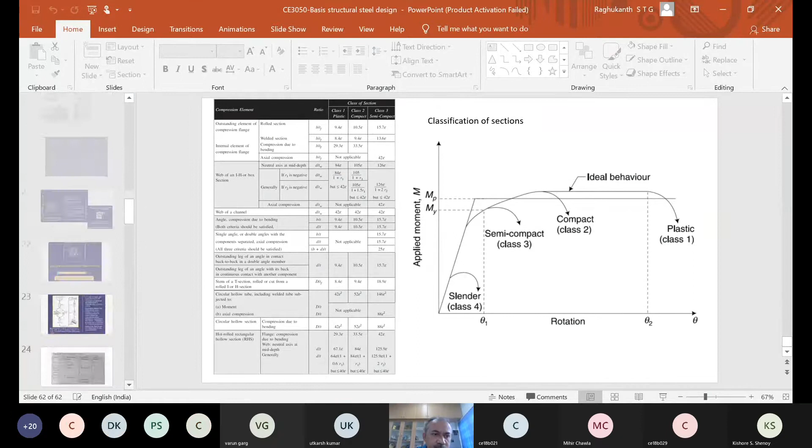Yeah, so you are able to see the screen? So you are able to see the screen now? Yes, sir, yes, sir.

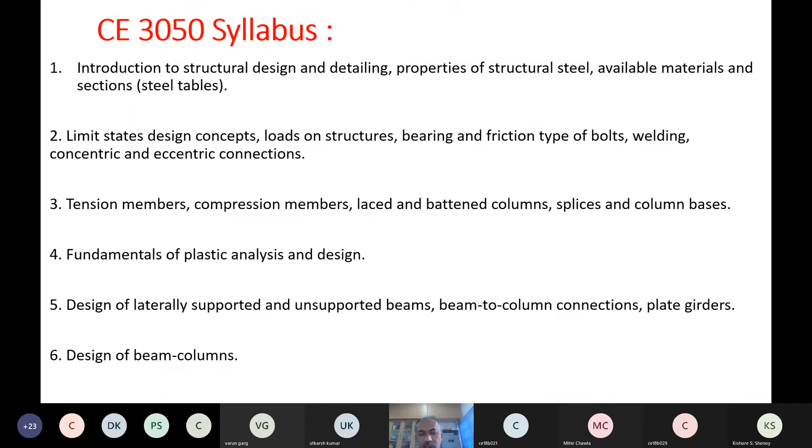Okay, so we started last week our course itself. We discussed all the basic things like the syllabus of this course, what we are going to teach, the textbooks, the code books whatever we will be using, then the grading patterns, how we are going to evaluate your assignments, tutorials, and exams.

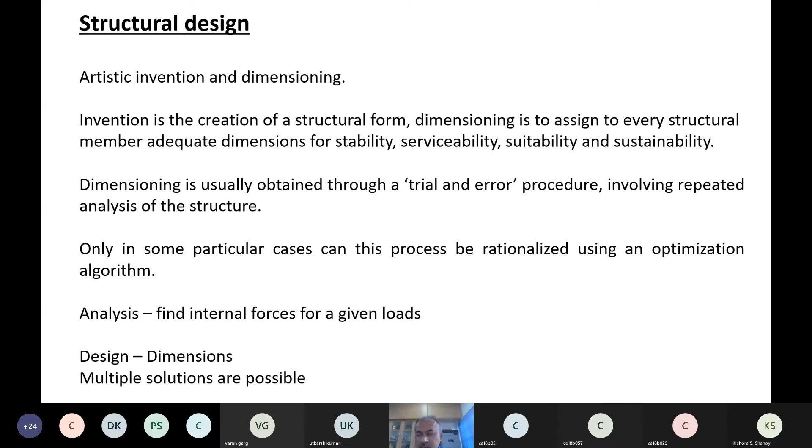And then finally, last class we said what do you mean by design, like dimensioning, invention, and all those things we discussed. And what is the process? How do we do the design?

Then finally, why we have to use this steel as a building material. So this is what we were discussing in our last class.

So finally we said the main reason was, that is like a broad thing, because iron is the fifth or sixth most abundant element in the entire universe. So it is abundant material, and it is advantageous to use this material for many other purposes.

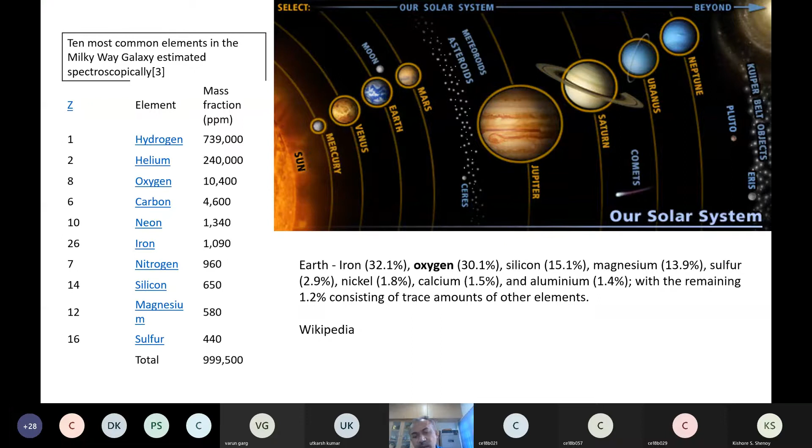And even in our earth, 32% comes is iron itself. And then we have seen the historical things also, I told you.

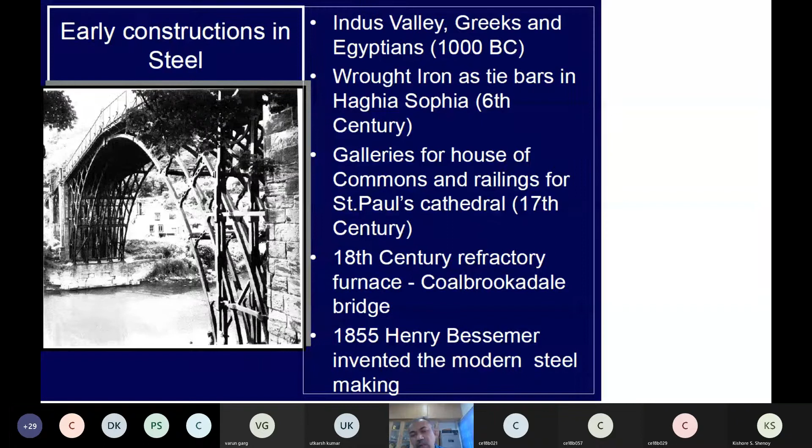But as already I told you, in India we don't see much steel construction in temples, because our Agama Shastras and others rate steel as impure material, this iron. So people use copper, bronze, and other things, and of course soil and rocks for construction. But steel or iron is given a very low priority in our olden days.

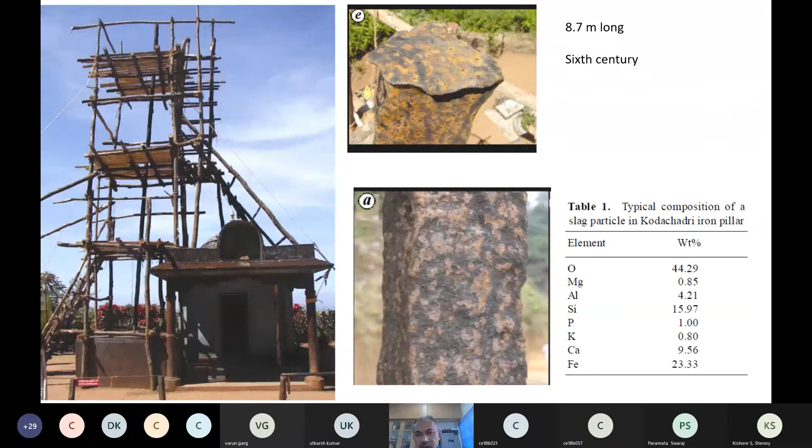But now things are fine. So I showed you all these historical things also, the Dhar pillar, then the Kodachadri pillar in Karnataka, where these old structures are there.

And then we have also said that iron has very little mechanical strength by its own nature. So the advantage is if you add carbon, the strength gets increased. So more carbon means more strength, but if you want something, you have to lose something. So ductility goes away. So what we do is balance between ductility and strength. So our structural steel means 0.12 to 0.25% carbon.

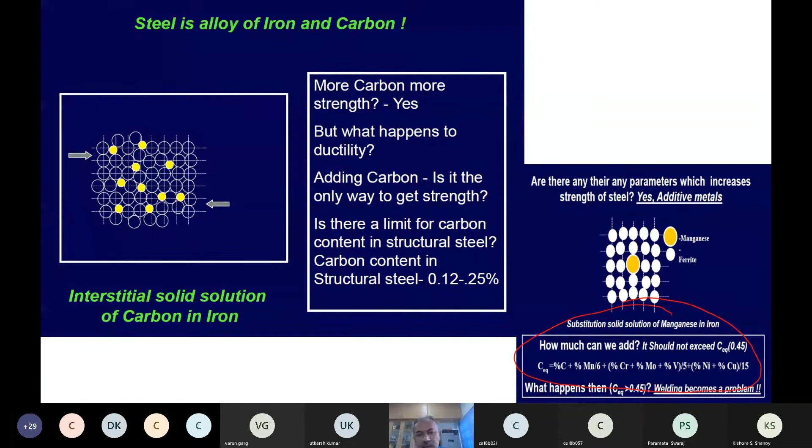And then we have also said nowadays people are adding many materials, not only just carbon, other kinds of materials to increase the strength and ductility, and so many things itself.

So this is what we said in our last class, and how steel is prepared in the factories and other things. And I already told you there are some nice videos on YouTube, so you can watch and find out how steel gets manufactured in practice.

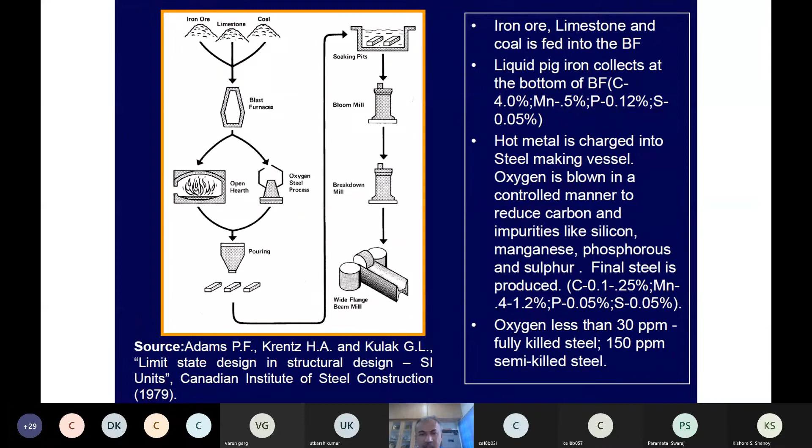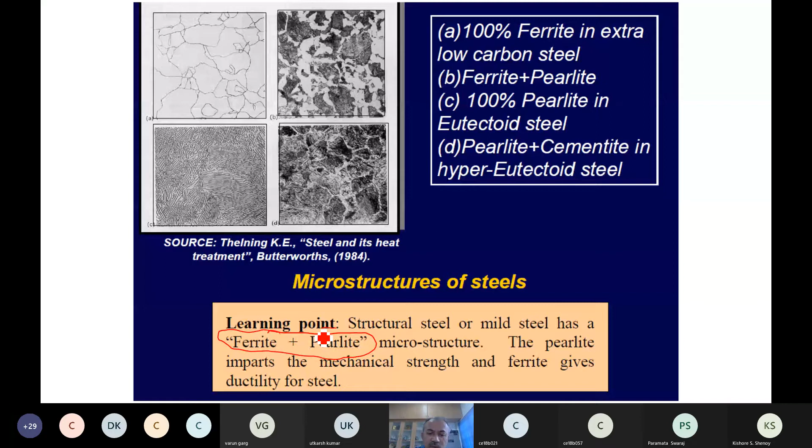Then metallurgical terms we have said, and finally the most important things for us are pearlite and ferrite. So this is the different phases also we discussed. And finally the steel definition is, if you look at microstructures, pearlite and ferrite. So this gives you strength and this gives you ductility. So two things will be there itself.

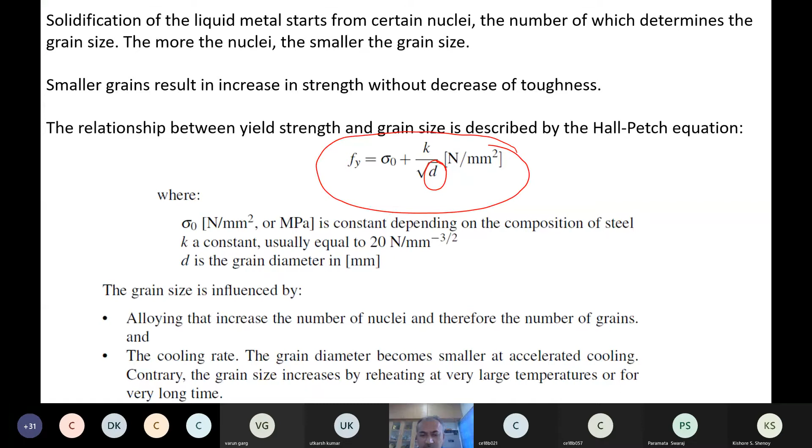So you can roll it into a variety of shapes, and this was one famous formula also, a metallurgical formula, where if you want increased strength, now you know how to increase the strength of steel by these metallurgical things. So D is this grain size diameter. So the cooling, alloying, that makes a lot of difference. Anyway, this metallurgy is a separate subject itself. If you know this much, it is sufficient as far as this course is concerned.

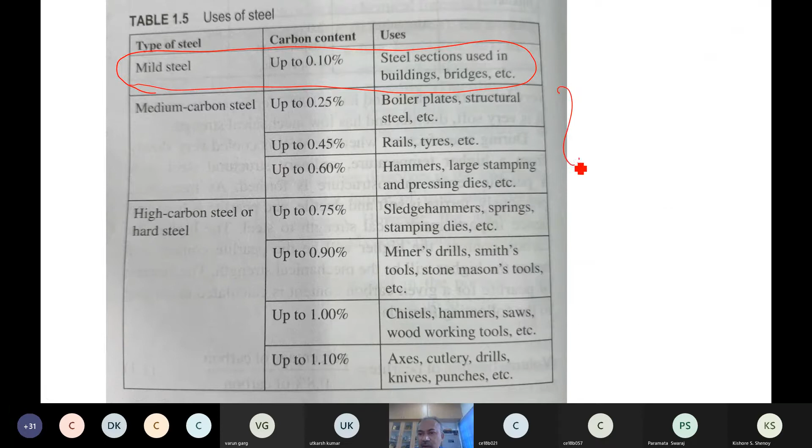So cast iron, wrought iron, this also we discussed in our last class. And this is our mild steel, which you will be using. So up to 0.1% carbon, this is what is widely used in construction. But other steels also are there, where mechanical, electrical, other people use a variety of these things itself. And this is our steel finally, so we will be using Fe 410 A, B, C, and Fe 440.

So this is what is manufactured right now in India in all the factories like Tata Steel, JSW Steel, and many other companies. And you should know this carbon equivalent also. This tells you how much extra materials you have added in steel to increase its strength. In India, carbon equivalent is almost 0.42. So this is the definition of steel itself.

Can anybody tell me what is 410? What is this, 410 or 440, 540, 590? No. So what does this correspond to? Ultimate tensile strength. Be careful, as I already told you, it is not yield strength. It is ultimate tensile strength of steel.

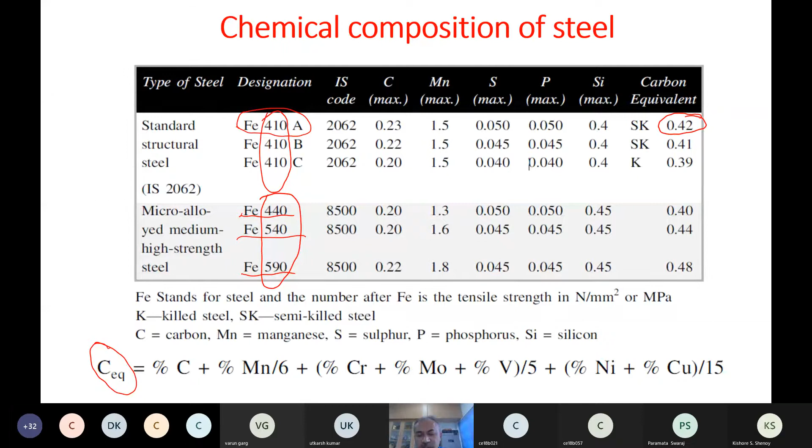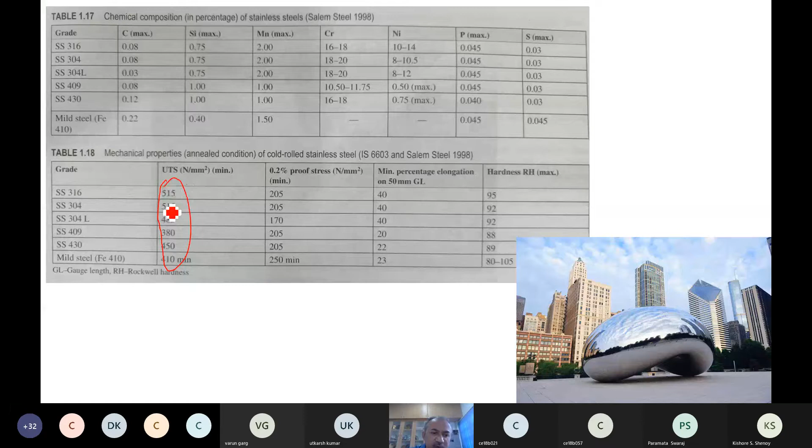So stainless steel also we have seen. Now we will not be discussing stainless steel in this course, but nowadays, what is the advantage of stainless steel? You can see ultimate tensile strength is very high, 515, whereas in the previous case it was 410. And the main advantage of stainless steel is we add chromium and nickel. So what is the advantage? What happens when you add this chromium and nickel in steel?

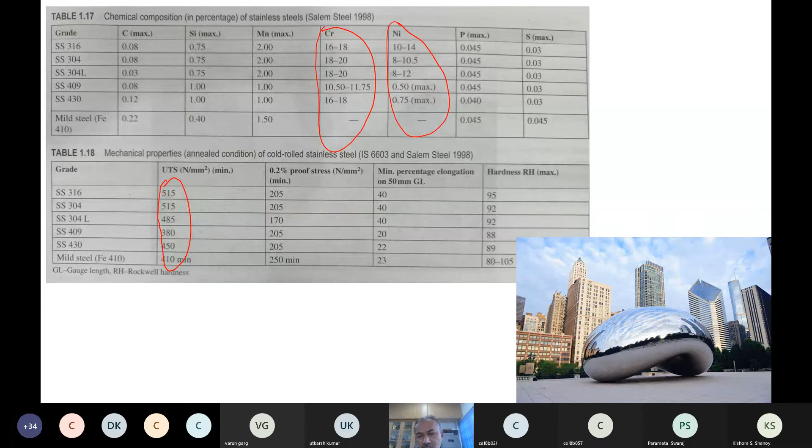What is the main advantage? Strength gets increased. Apart from that, what extra thing you will get? No rusting. No rusting, because of this chromium and nickel. We have Salem steel, which is widely used in cooking and other things, but now you can use it even in building construction. As I told you, our Indian companies are also looking for a stainless steel code, a separate code on how to design stainless steel buildings.

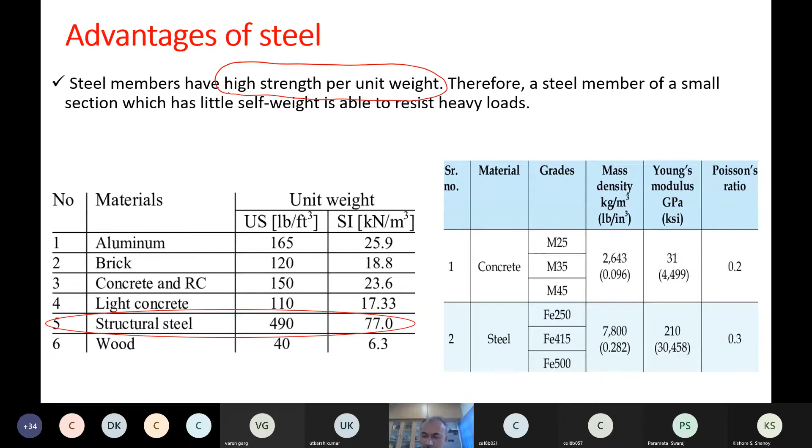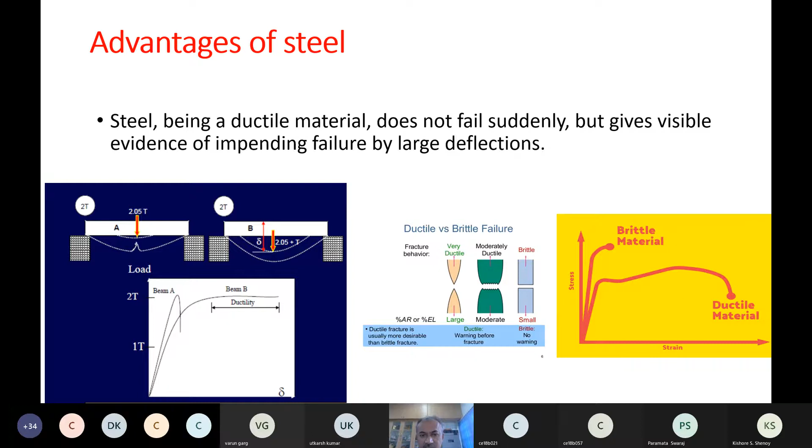Now coming to advantages of steel, one is high strength per unit weight, as I showed you when comparing with concrete and wood. These are the parameters for mild steel. Then finally we went for ductility, and I showed you this test, the stress strain curve of mild steel. We even watched a YouTube video, you followed the video itself.

Last class we discussed what this portion corresponds to, this region. That is plastic only, because you have crossed the yield strength. If you zoom this portion, you will see some small variations in the stress strain curve. What are these variations known as? Last class I introduced you to that word. What is that word? Luders bands. You would have studied this even in your mechanics of materials course, because it's a fundamental thing.

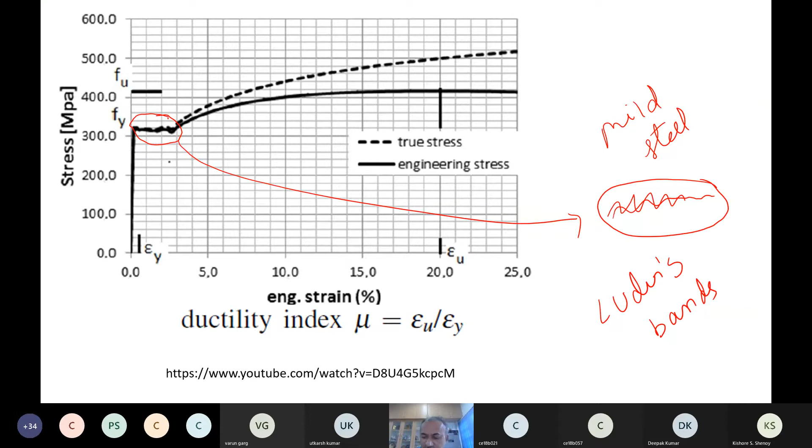So what happens with a Luder band is, when you do this tensile test, at this portion stresses will be high, so you will see these type of bands here. You can see the angle of these bands - it will be somewhere around 45 to 55 degrees. You will see these type of bands.

The definition of Luder band is it is like a region which demarcates yielding - the yielded portion and the unyielded portion. So it demarcates this section: this portion has yielded, whereas this portion has not yielded. So this is how yielding starts in steel.

Now can anybody tell me why this Luder's band will be at 45 degrees approximately? Why do they occur like this? Consider the specimen subjected to tensile axial force, with P here and P here. The failure is basically like this type of failure, these yielding bands coming like this. So why is it like this? What is the speciality of 45 degrees? It is the failure plane at which maximum shear occurs.

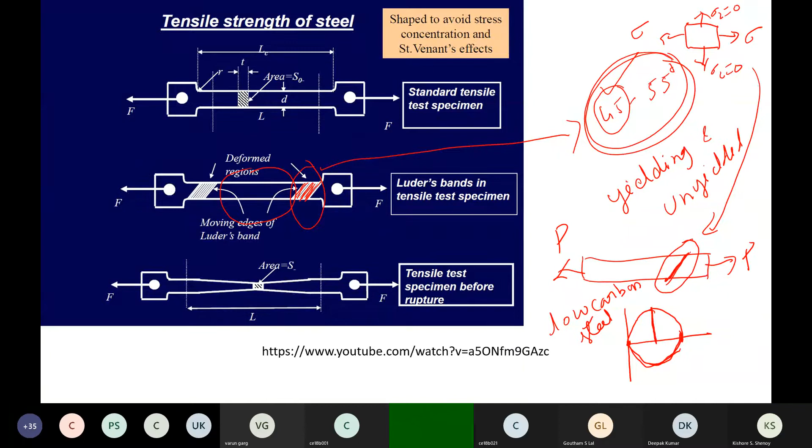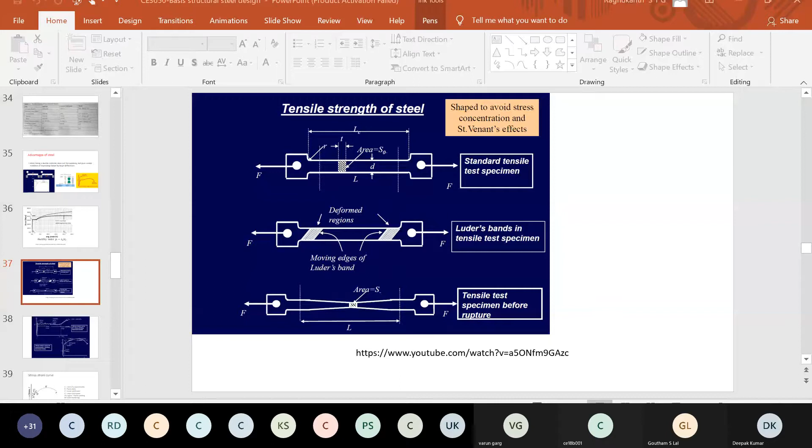So there are some videos also on YouTube, I will just show you. Now, where is this?

Are you able to see this one? Yes sir. So this is a nice YouTube video where you can see these Luder bands, how they form actually.

So this is a specimen, exactly a coupon test as they say in our terminology. So you take a small steel coupon, with gauge length 5.65 times root of A0, and you apply this. So you can see how the Luder bands form as you keep on increasing the strength itself.

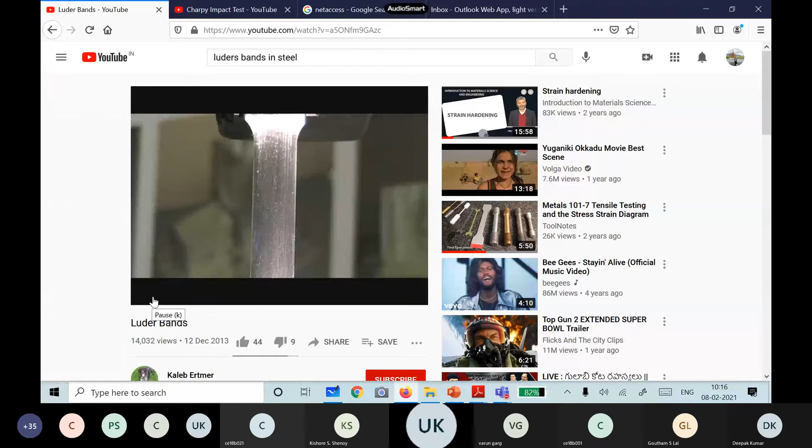So you can see how these things are getting formed. See, he is increasing the load.

So once the load is getting increased, okay, you are able to see here how this band is moving slowly here.

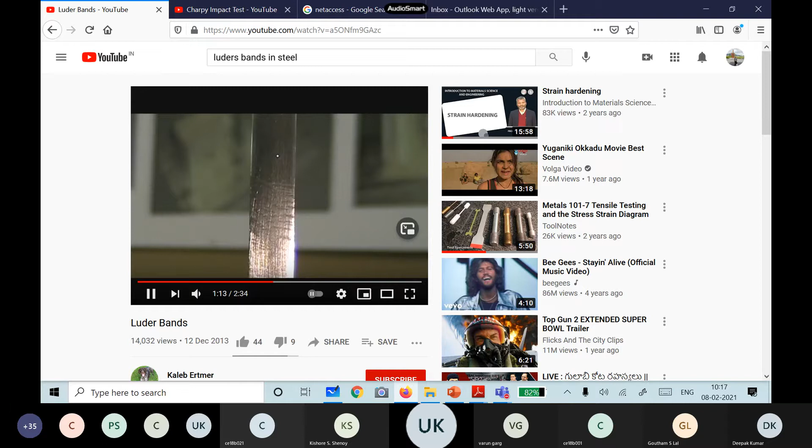See, here this portion has yielded, whereas here it is the unyielded portion. So as you keep on increasing the load, slowly everything is coming into yielding - this is what we call the Luder's band.

So here also you can see that 45 degree or 50 degree angle. So slowly the yielding has happened across the entire specimen itself. This is how Luder's bands look when you do these experiments.

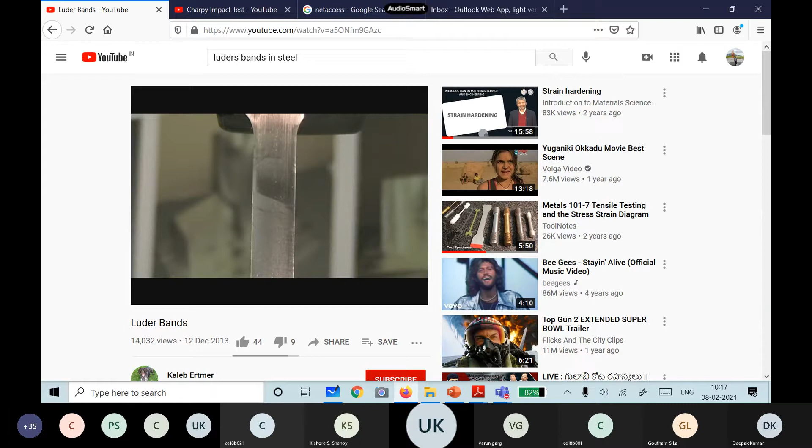Now, I think he will show you the specimen also, so you can see how the Luder bands are forming and how they are going up.

So you can see this is how the specimen looks like. You are able to see these type of things - it will not be exactly 45 degrees, but you will see these type of patterns when you do the test itself.

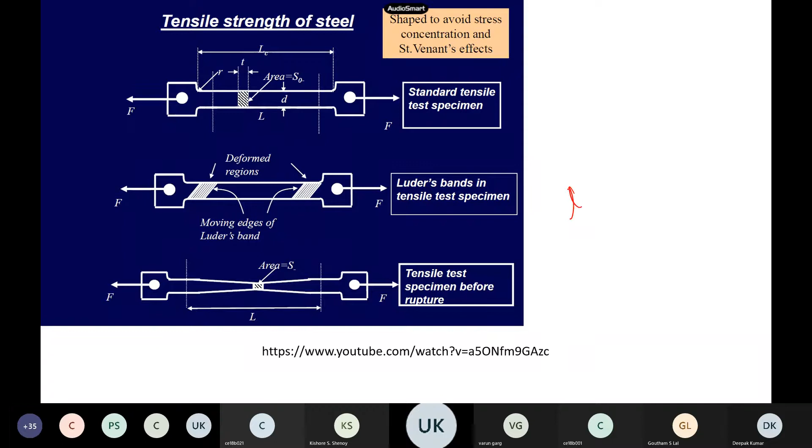All right, so now you are able to see the PPT, right? Yes. Okay, so this is how the Lüder's bands come into picture, but this happens only in low carbon steels - in high carbon you will not see this phenomena. So this is what the Lüder's band. Once it has crossed the elastic range, we have gone to plastic range, so whatever variations you see in this region are essentially due to these Lüder's bands. Once after this, your strain hardening increases and it goes away.

Now if you are having high strength steel, there will be no Lüder's band. You can see here - it just goes like this, and then becomes this type of thing you will see for continuous yielding, or for high carbon, high strength steels. Anyway, we are discussing mild steel only, where Lüder's bands and other things will be there.

Now from the stress strain curve, we have several points: point A, the limit of proportionality; then B, the elastic limit; then the higher upper yield point; then the lower yield point; then point D, where strain hardening starts - so DE we call the strain hardening portion.

Then the ultimate tensile strength comes here, and finally necking starts from E to F, and then finally it breaks. This is the final stress itself, where your specimen completely becomes two pieces - it just breaks. This you would have studied previously also.

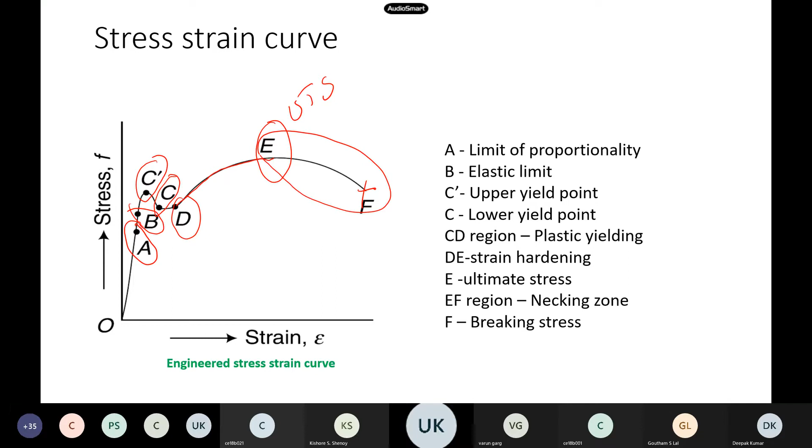So these are all the variety of points which you can identify in this stress strain curve of mild steel. Now if you take a mild steel - low carbon steel - you will see this type of plateau because of Lüder's bands or plastic behavior. This plateau comes into picture here, then it goes like this, and finally comes back. If you see high strength steel, as already told, it has very high strength but no ductility - you will see this type of failure.

So when you compare mild steel, all of you should remember these numbers - whatever we will be using in this course or in construction. Now this point B, where it goes into plastic range, this strain is 0.0012. All of you should be able to remember this number.

And then this yield plateau, where strain hardening starts, is almost 10 times of 0.0012, so this will be 0.012. This is the place where strain hardening starts.

And then the ultimate tensile strength - these are not exact numbers, but more or less close - you will observe this ultimate tensile strength at 0.15. This is also a very important thing. And finally the breaking point, point F, happens at 0.23. So these are very important numbers: 0.0012, then 0.012, 0.15, and then 0.23.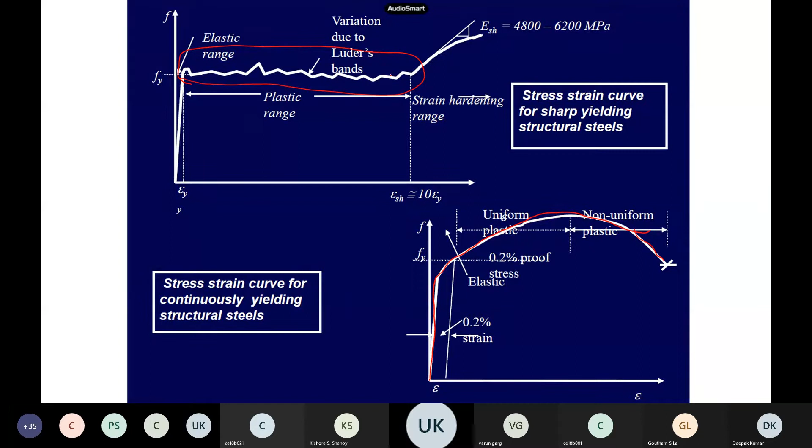These are idealized curves, which you would have studied in mechanics also. Practically when you test a specimen, you will not see that type of smooth behavior, you will see irregular results. This is how the test results look. But generally in practice, for idealization, we draw the curve like this, removing the irregular portion. Sometimes it's very smooth, but we assume it to be bilinear, the curve itself.

Another advantage of steel is its metal properties. It has very tough actual behavior, it has both strength and ductility. So this is one famous test we do, the notch toughness test, to find out how tough your steel is. You can see how this test is carried out in practice.

I will just show you this video. Are you able to see this video? Yes sir. So this is the test, you can see.

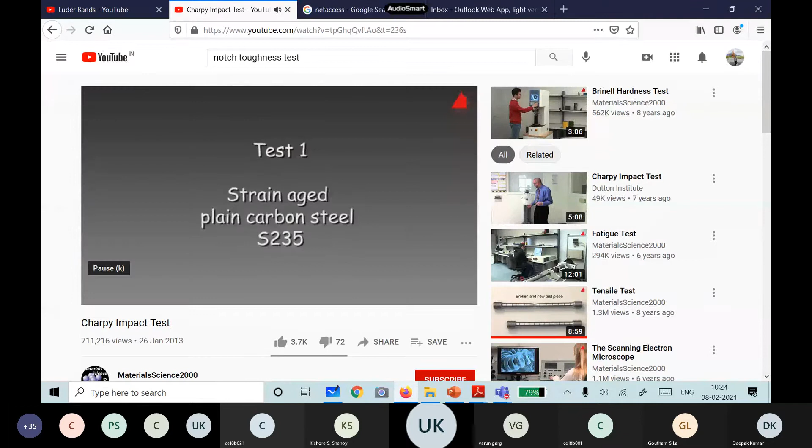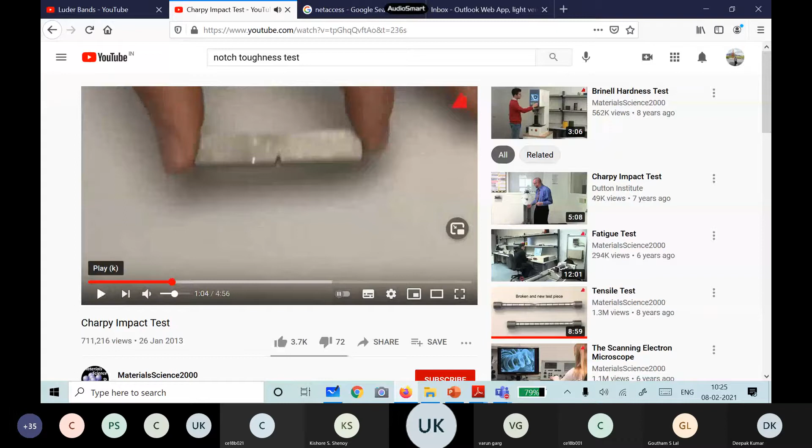So before doing the test, they put this notch so that it hits exactly there.

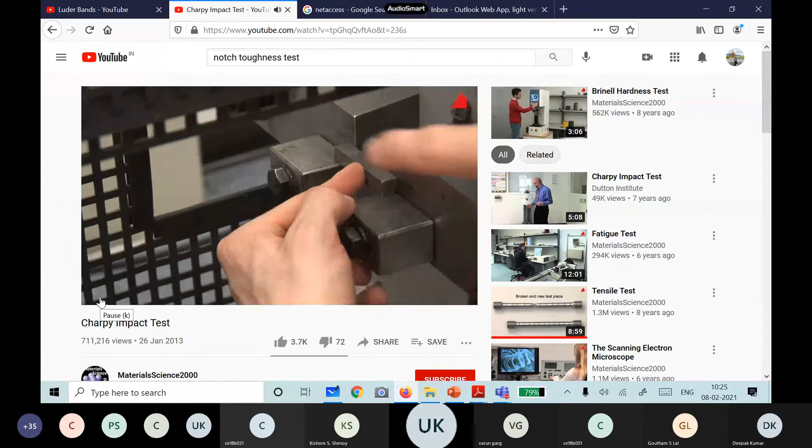So now he releases that, and you can see how it has hit the specimen.

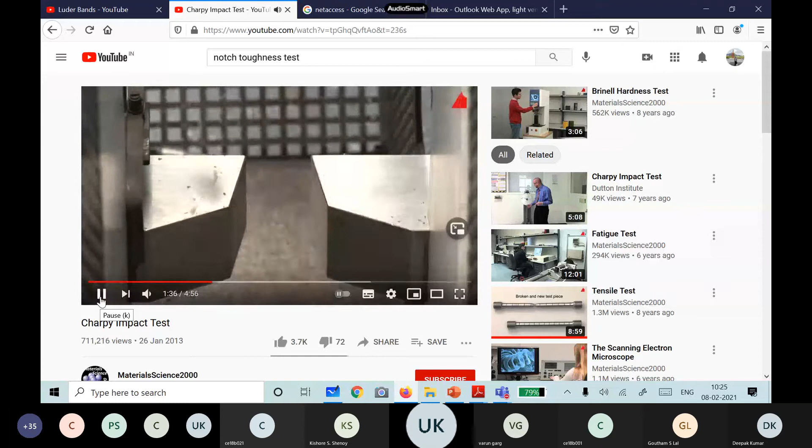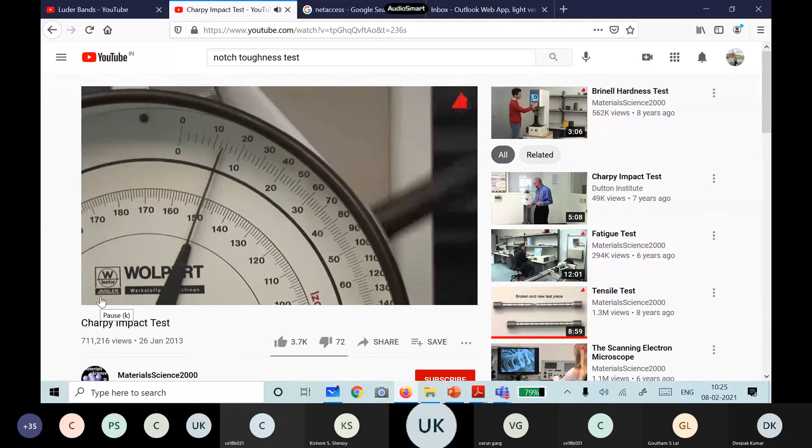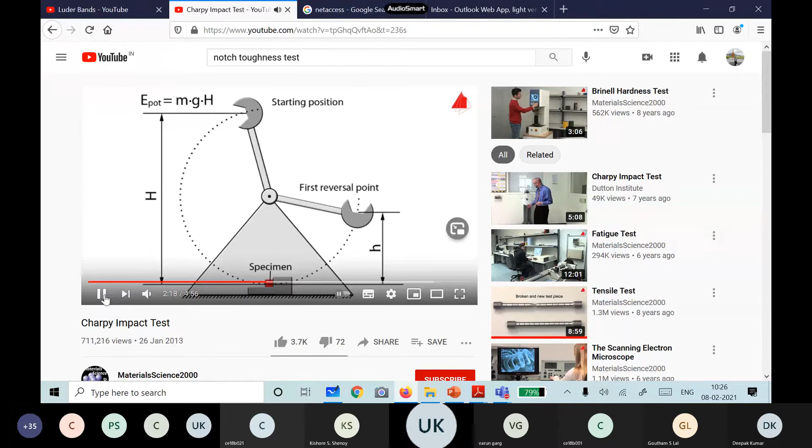So finally here you get energy. This is the potential energy you have, and it automatically calculates how much energy. So this is how they calculate the energy.

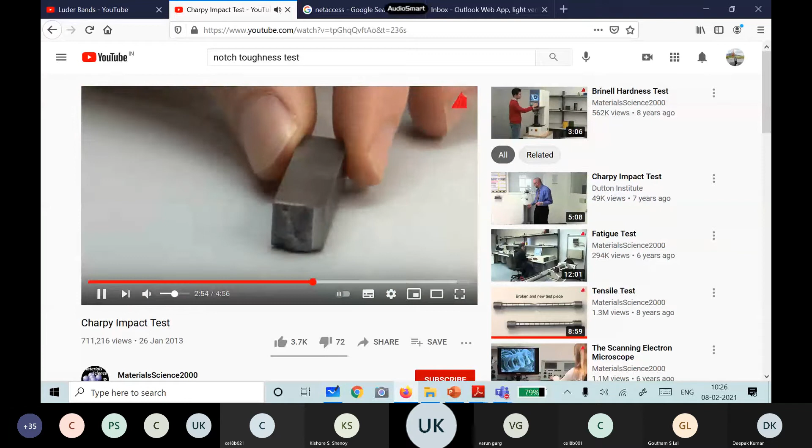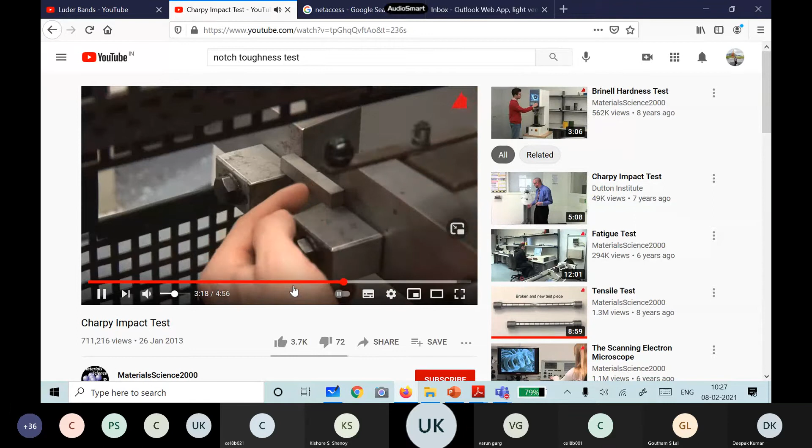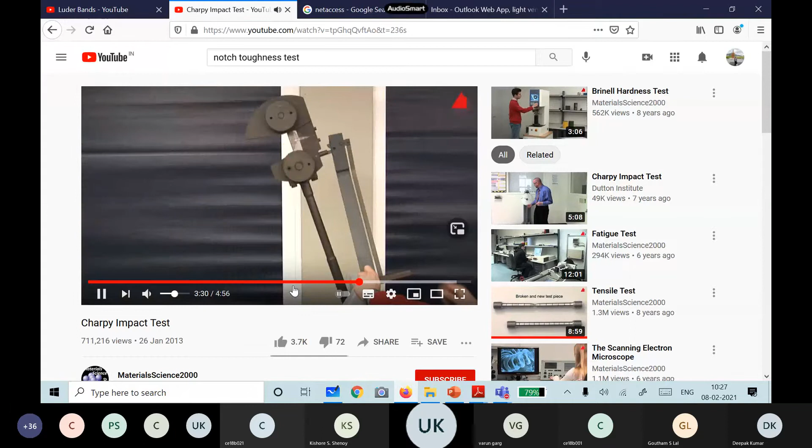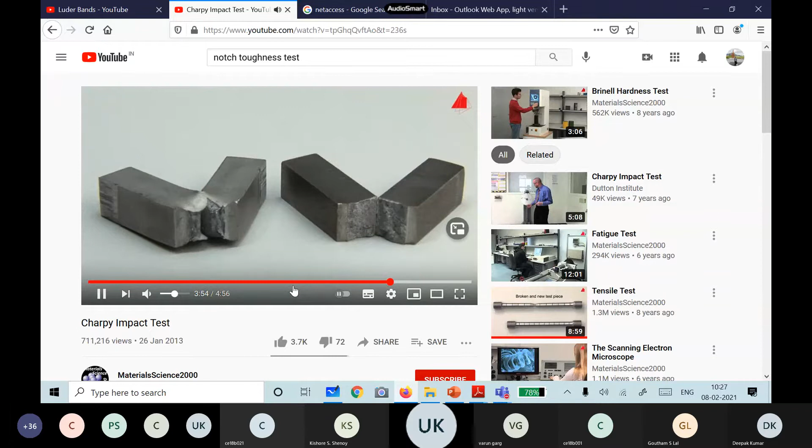You can see the first specimen. Now he does our mild steel, normalized steel. You can see its ductile behavior. So this is how people carry out this test.

Now if we go back to our PPT. Now you are able to see the screen, right, our slides? Yes sir. So now you can see, he drops a hammer and finds out how much energy these specimens are going to absorb. From that, they tell us how much energy has been absorbed, in joules and other such units.

Now from the stress strain curve, how do we get energy? If I know the stress strain curve of steel like this, how do I find out energy? What type of energy will be there during deformation? In mechanics of materials, you would have studied this, when you plot the tensile stress strain curve, if I want to find out how much energy has been released or how much work has been done, what is that energy term we use in mechanics?

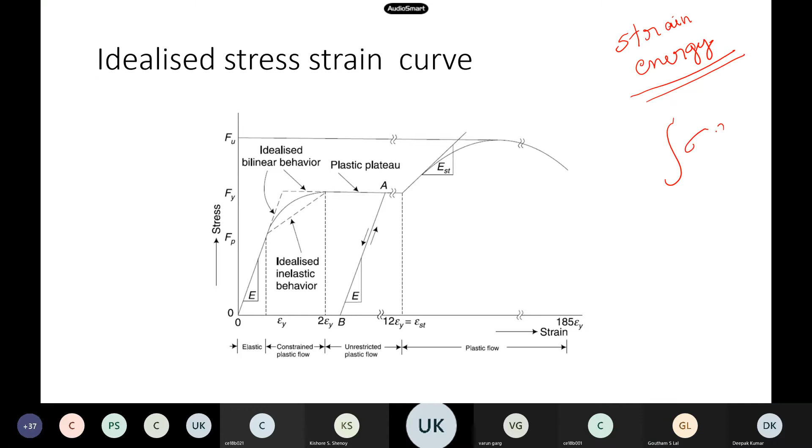Strain energy, sir. Excellent, so what is strain energy, how do you calculate it? From the stress strain curve, I am showing you the stress strain curve of steel, I want to find out strain energy, tell me. Area under the graph, area under the curve. Excellent, so it is just sigma d epsilon, that integral, that's all. That itself gives you the strain energy.

Now this test is also mostly based on energy. You have seen that potential energy, how much it is getting transferred to the specimen.

So this energy, you can get from the experiment, like 23 joules that video has shown you. Apart from that, if you know the stress strain curve of steel, you just compute the area, and that itself will give you this energy.

So in the energy also, there are two things: toughness and resilience. These are two very important words. Toughness means the whole area you followed, the total energy, both elastic and plastic. So the total area under the curve is known as toughness. How tough is your specimen?

Now there is one more word, resilience. We will not be using that word in this course, but resilience nowadays is a very, very popular kind of thing. So what is meant by resilience? We have written there, toughness means whole area. Now resilience means elastic area, only the elastic.

So suppose if I say resilience is very, very high for a material. What does that tell you? Yield strength is very high. Apart from that, the resilience of a material is very high, so its elastic strength will be high. It means if something happens, it can go back to its original position very easily.

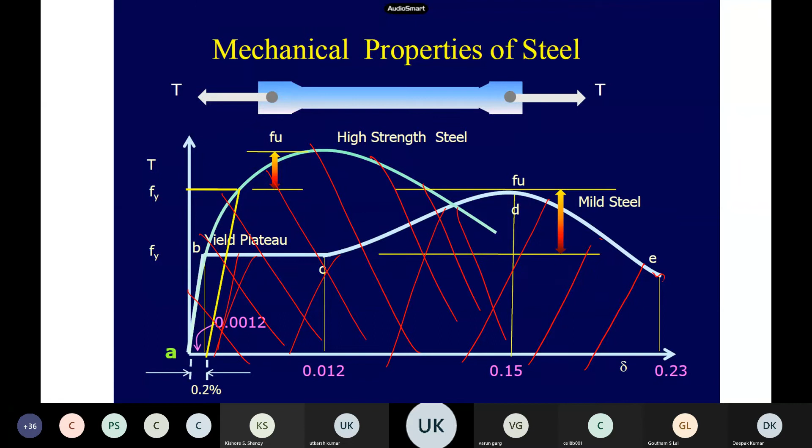Like you have seen in that video, I showed you two specimens of mild steel. One specimen was high strength steel, so it just becomes brittle and the area is very low. For example, if you find out the area under this graph for the mild steel versus this steel, the area under the graph will be less for high strength steel but more for mild steel.

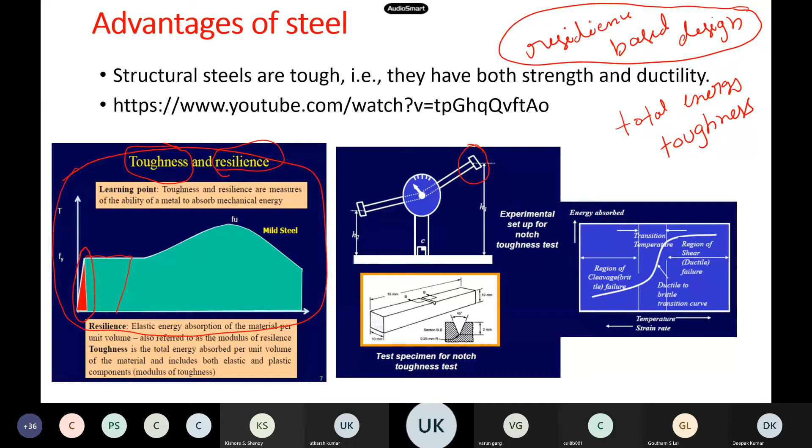If you compare our steel with concrete and other materials, steel is very tough in strength and ductility. Please understand that toughness means the area under the full stress-strain curve, while resilience means only the elastic portion. Resilience is a very tough word to achieve, but toughness is fine, because you are expecting too much from resilience.

Now, one more thing about steel, which we will not be using in our course, is the Bauschinger effect. Can anybody tell me what this Bauschinger effect means? Have you heard this word before, in mechanics of materials or somewhere? You have not heard it? Is this the first time? First time, sir. Okay.

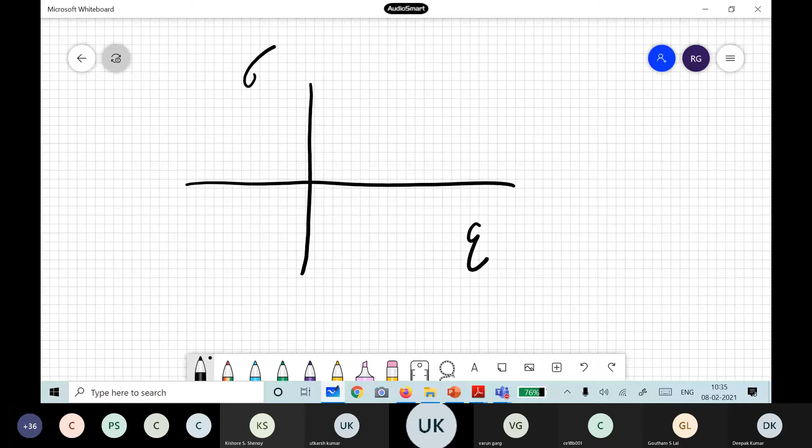Anyway, it is an interesting property, but this property is important for dynamics. When steel is subjected to fatigue loading and others, you will have a stress-strain curve, sigma versus epsilon. It is subjected to fatigue, some cycles, or stress reversals, or load reversals. Where do you see this type of cyclic loading?

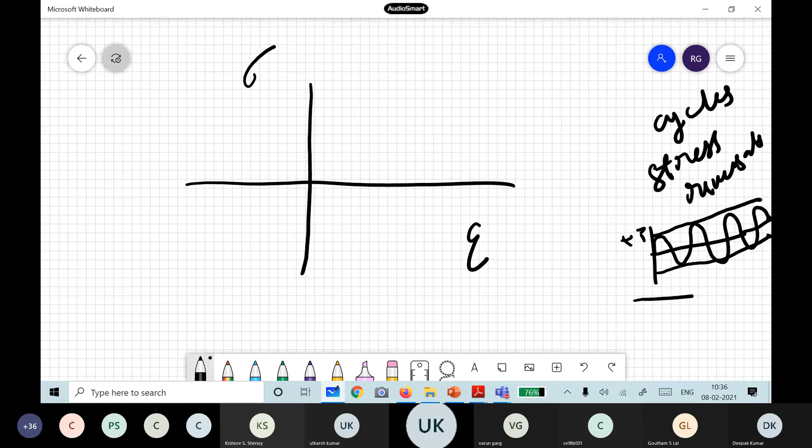It is a dynamic loading where the load is applied like a sinusoid. The amplitude is constant, the compression and tension, the negative and positive side amplitudes are the same, but it is applied in some kind of cycle. So the load becomes plus P, then minus P, then plus P, minus P, like this. Your specimen gets subjected to tension, compression, tension, compression, like this.

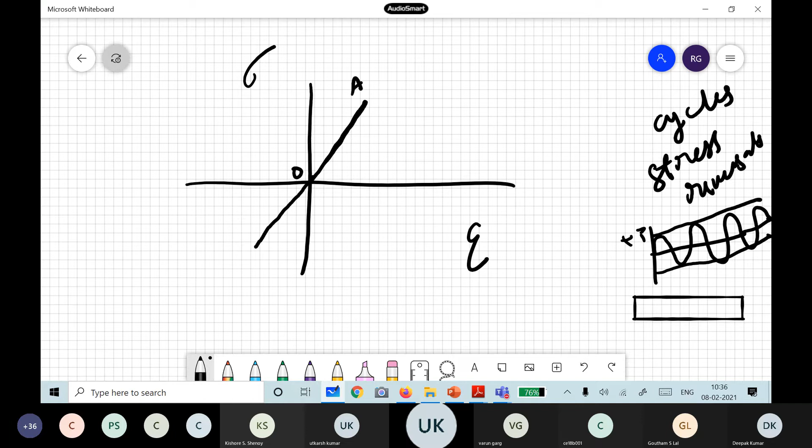Now here's what happens: suppose you are in the elastic range only. Let's say you have loaded your specimen only up to the elastic limit, and then if you release the specimen, it comes back to its original position. Now let's say you apply minus P, in the other direction. If it is in the elastic region, the curve will be like this, O, A, you followed, right? This is the elastic region, so the curve will look like this if it is elastic.

But let's say you have gone into the plastic region also, you have increased the tensile strength of the specimen, so it has gone into the yielded or plastic range, you followed, right? Now you bring it back to the original position. If you unload the specimen, because it has already gone into yielding, it will not come back to its original position. It will come to some other position.

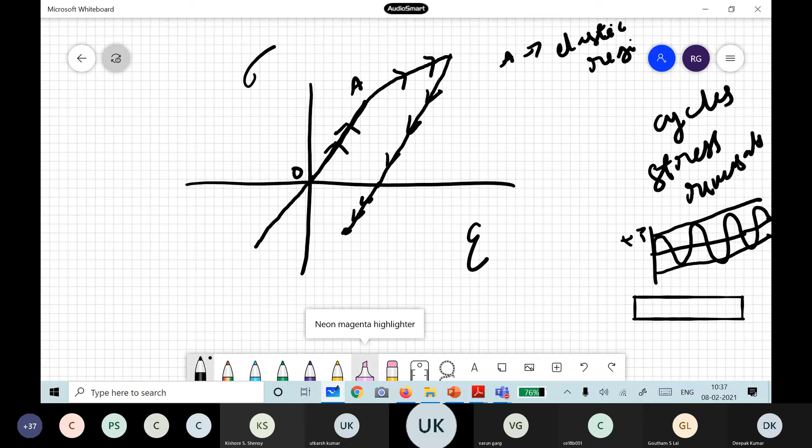So this happens. Now once it has come to this position, you are once again applying compression, because the load is getting reversed. So now the specimen goes like this, and suddenly after some point, it starts yielding, and it becomes like this.

Now if you compare the yield strength in this portion and this portion, this was the original yield strength. What has happened to this yield strength after the stress reversal? You applied a tensile force, increased it so the specimen went into the plastic range, then released it, so it came back to this position. Now for the same deformed specimen, you apply a compressive load, and the yield compressive strength decreases.

Okay, but if it is in elastic range, say you have applied only in elastic range and then come back to its origin, and this is a yield strength Fy, and then you release, specimen comes back to 0, and then you apply compressive strength, say. So specimen will go here. So this yield strength will be same actually. Fy only will be there.

But once a specimen has gone into plastic range, and then you release it, and then you apply negative compressive strength, so the yield strength reduces almost. And this happens in every cycle. Once again you increase and then you follow. It goes like this, and then sometimes it becomes like this also. And each time you go, it decreases, and you will see these type of loops.

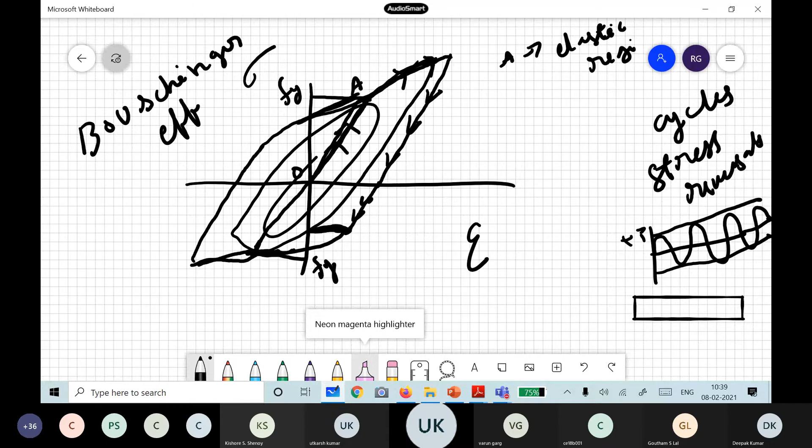Steel also exhibits this type of thing, but this is very, very important for dynamic loads, essentially cyclic loads.

Where do you see cyclic loads in practice on steel structures? Now what type of cyclic load means? Where do you see these type of loads? Machines. No, we are talking about our civil structures. So which machine do you mean to say? The steel bridges and all.

Steel bridges, excellent, because vehicles will be moving, dynamic, and the vehicle also will move with constant velocities, that flyovers and others, so this dynamic load will be there. Apart from that, somebody told machines, suppose if your foundation is of steel, let us say you are hosting a turbine or something, a power plant in your structure. Once it is rotating, that also will cause this type of stress reversals, positive, negative, positive, negative kind of thing.

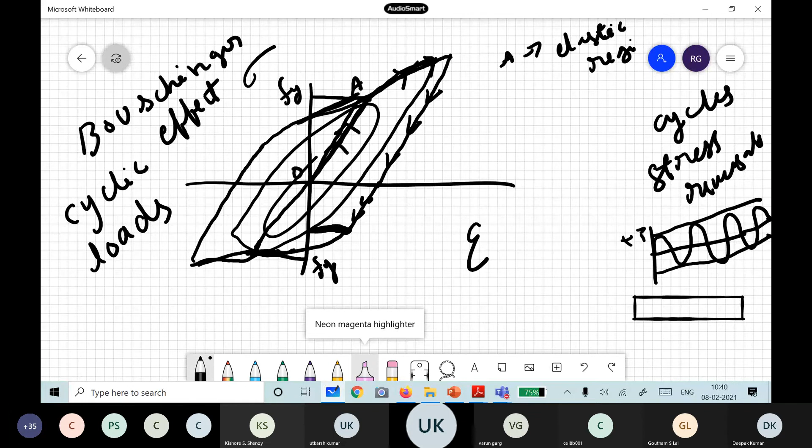Another thing, where do you see this type of cyclic loading? Apart from bridges, you have told trains, railway tracks, the train loads essentially. So if you have a bridge and train is moving, then this becomes very, very important. But anyway, this comes for cyclic loads and dynamic loads.

Okay, Bauschinger effect itself, as already I told you. So what is the Bauschinger effect? The increase in tensile yield strength of the material occurs at the expense of the compressive yield strength. So this is the definition of the Bauschinger effect.

So I have drawn the same thing. See, like here you have gone, this is sigma s. So compression and tension will be same in the elastic range. But if you have used the increase in tensile yield strength, it decreases your sigma dash s itself. So this we call the Bauschinger effect itself. This is a very, very important thing for structures, but of course this is only applicable for cyclic loadings.

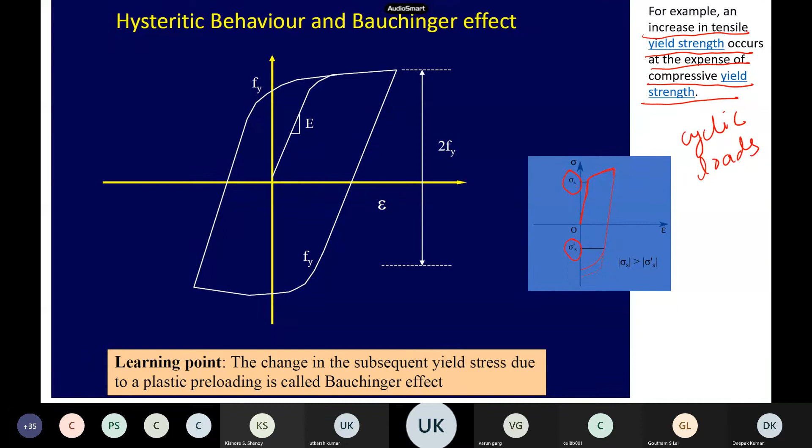Bridges, when you are designing, you follow, right? This is a very, very important thing. Now another advantage of steel, we have seen material properties like yield strength, ultimate tensile strength, ductility, toughness, resilience, and the Bauschinger effect. Like that, you can derive many metal properties.

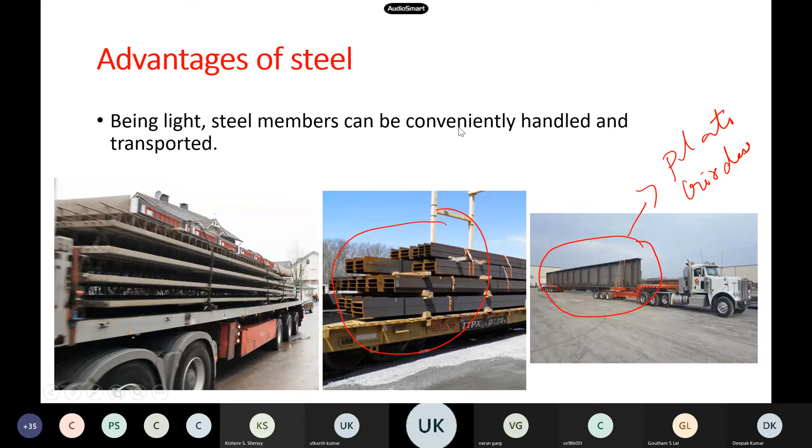And faster construction also, steel is much useful. Have any of you heard about this startup which your seniors have done in our research park? Any of you have idea about this one? MediCAB. Have any of you heard of this?

Your seniors only did this - maybe 2-3 seniors you understand. Remember this COVID time? This was very useful because people wanted to do emergency construction of hospitals or modular housing. This was done by our own IIT people, your own seniors. They made this MediCAB in Wayanad, Kerala.

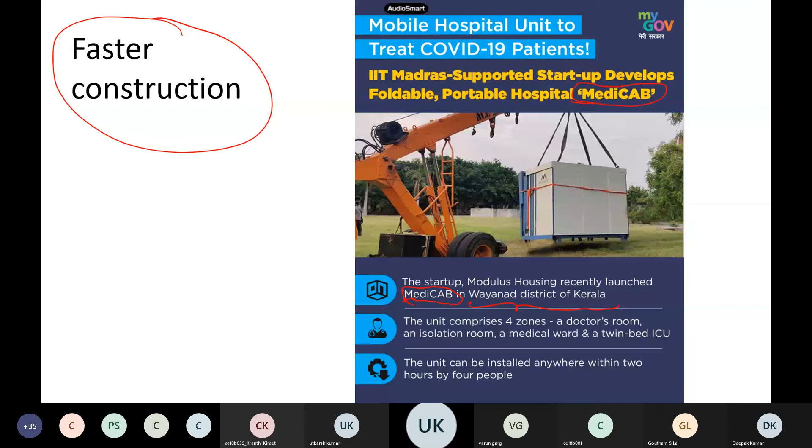With this course only they were able to design this. Of course there are a little bit of composite things involved. It was like you could construct a hospital within one day, this quarantine center or something - that is the advantage of steel itself, faster construction. This was done by your own seniors. You can Google it, it became very popular because of COVID since it can be installed very fast, and it's been done in Kerala. Many places have adopted this type of construction also.

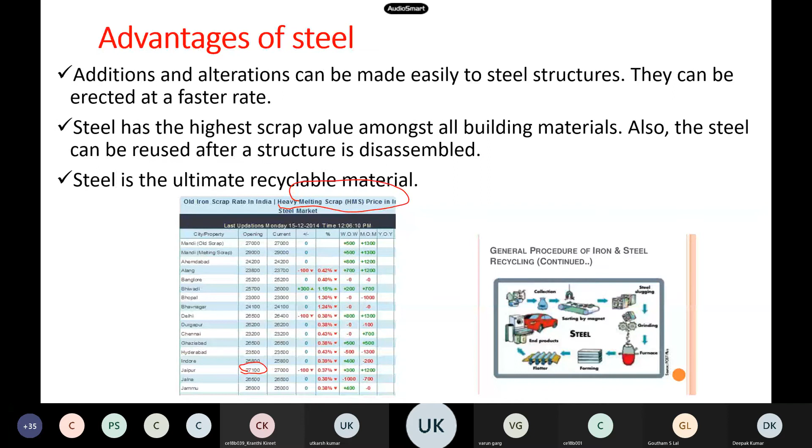What's another advantage of steel? Of course, steel has the highest scrap value. There's nothing to lose with steel - you can sell it, and they melt it and make steel once again. This is something I just downloaded, the melting scrap steel price. At Mandi market, Bhopal, Delhi, you can find out how much steel costs. Jaipur you can see 27,000 - this is the price, the scrap value of steel. So you can recycle it and do whatever you like - that is another advantage of steel.

Now coming to the disadvantages of steel - the main disadvantage is rust. Why does rust happen? For what type of steel do you see this rust? Mild steel, because of the carbon. But if it is stainless steel, like the stainless steels you use in cooking and in your houses, does rusting happen? No, because it's stainless - you add chromium and nickel. But since stainless steel is very expensive, that's why we go for mild steel.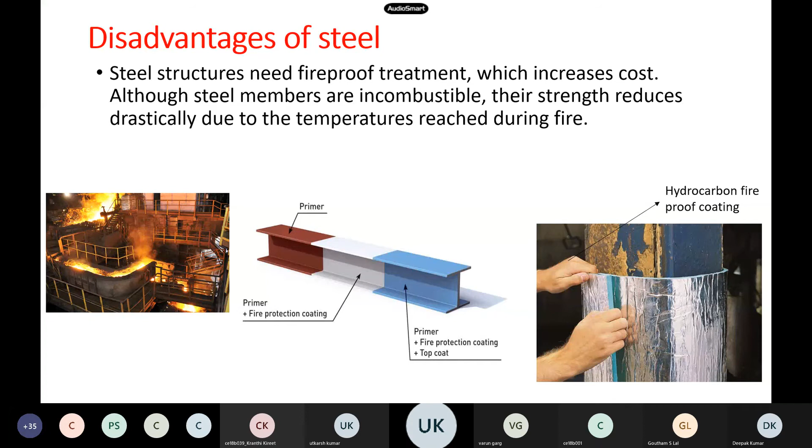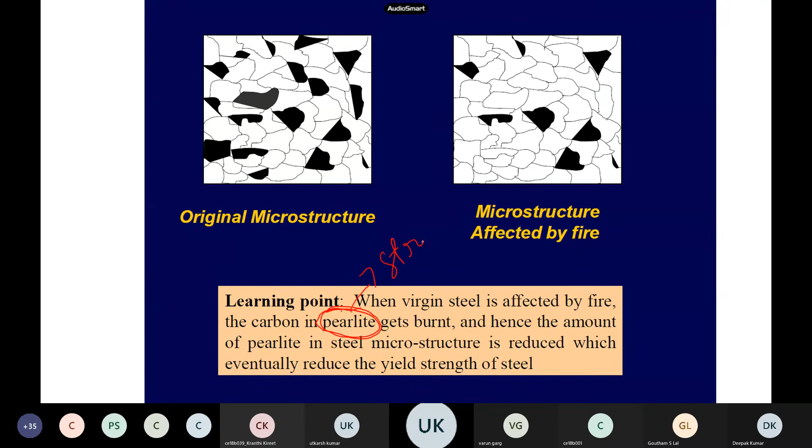So this is the most important disadvantage. Generally what people do is apply all kinds of coatings nowadays, which can increase fire resistance. As I already told you, steel has ferrite and pearlite - pearlite gives strength, ferrite gives ductility. But when steel is subjected to fire, this pearlite gets burnt, and since this is what gives strength to steel, that strength decreases.

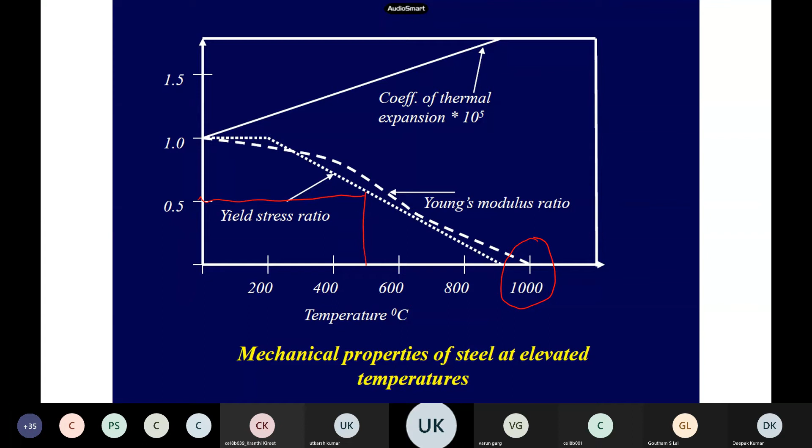This is a graph - when steel is at approximately 500 degrees, the yield strength is almost 50%. So if the yield strength is 250, when subjected to 500 degrees centigrade, its yield strength will be only 125. At 1000 or 900 degrees, your steel has no strength left. This is a very significant disadvantage of steel structures when subjected to high temperature. So researchers are working on developing coatings to increase this strength.

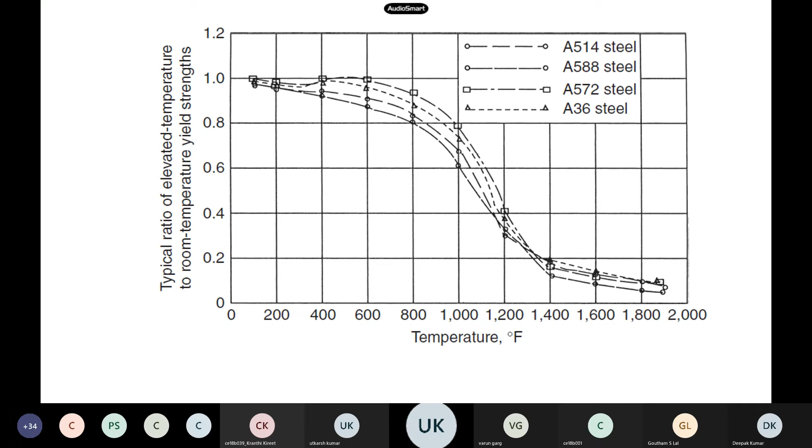This is for American steels - A514, A588, manufactured in America. Our IS code uses FE designations. There also, this graph at 1000 degrees - you can see the strength, given here in Fahrenheit - shows 60% of the strength automatically goes down.

Now another main disadvantage of steel is corrosion - this is also a very big headache for steel structures. What is meant by corrosion? When you have iron subjected to air, oxygen will be present, along with moisture, that is water. When all these three combine, you get a chemical reaction and you get rust. Rust means hydrated ferric oxide. This rust is a very big issue for steel structures - people say if you have 1 cup of steel and it rusts, you will get 6 cups of rust.

The volume increase also happens when steel corrodes. 1 cup of steel will give you 6 cups of rust. You would have seen this in your houses, if the steel bars inside your concrete corrode, that whole portion expands, because 1 cup gives you 6 cups of rust, and then we have all these types of problems.

So how to avoid corrosion is a big research area. People are working hard, like developing zinc coating and other methods.

So how to reduce this rust, sometimes in our design we also do like this. Suppose if I have a channel section, instead of exposing it to the atmosphere, you can shape it like this, like this type of angle section, to avoid this corrosion. So there are so many techniques to avoid corrosion.

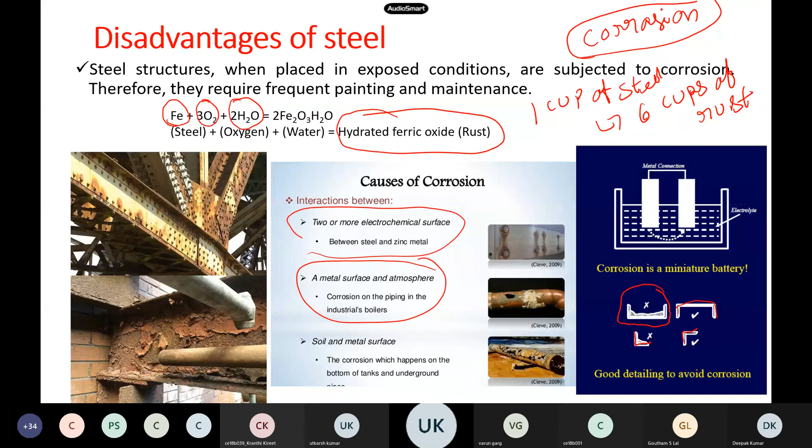Another important thing is whenever there is a sharp change, say like if I have a T section or I section, the sharp edges - wherever sharp edges are there, these places steel loses its ductility and becomes more brittle. Suppose if I have a smooth transition instead, like in IS code all the steel uses this smoothing, then there will be no sudden change.

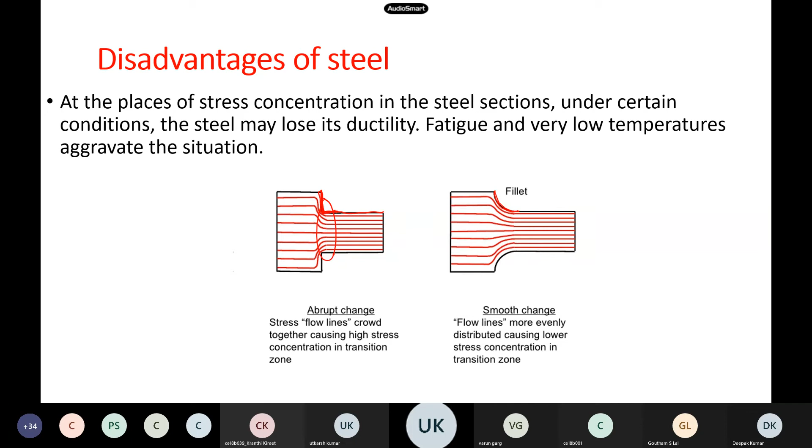So here this will be ductile, but if you have sharp edges, there is a chance that the steel may lose its ductility and become brittle, and failures happen at these junctions. So this is also one disadvantage for steel. That's why when joining an I section with other things like angle sections, you should follow smooth transitions.

I already told you about fatigue, that is cyclic loading. This is also a disadvantage for steel. There are endurance limits and other concepts, like how stress decreases with cycles to failure. If you see this curve, when it is applied to low cycle fatigue - low cycle means this load is getting applied slowly. Then high cycle means the load is applied very very fast.

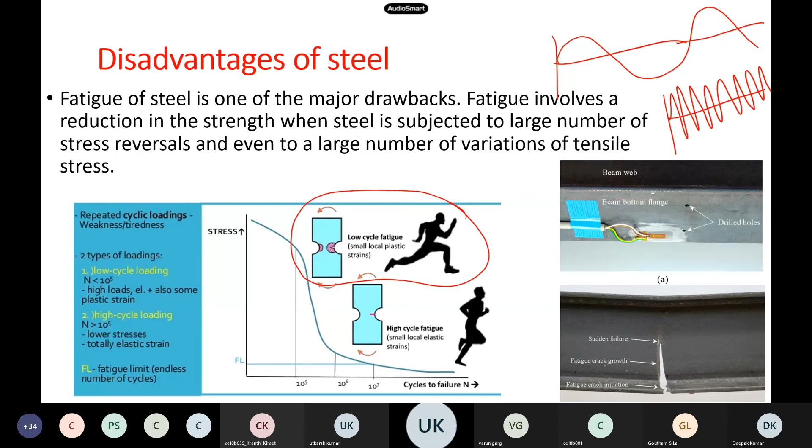Steel behaves in a different fashion - low cycle means something, high cycle means something else. This is also a disadvantage, that fatigue happens, but this you will observe only for dynamic loads, not for static loads.

So finally, I have told you the advantages and disadvantages. But anyway, whether advantage or disadvantage, in this course you are going to study steel design only. So finally these are the material properties which we are going to use in all our designs, available in IS 800.

If you open the code book, which I have sent you in WhatsApp, they will give you these properties you have to assume. So in tomorrow's exams or whenever you are doing design problems, I will not give these material properties. We say design just a steel I-beam or something like that, and you have to assume unit mass, Young's modulus, all those things given in our IS code. We should use this and solve all the design problems.

Oh, ALS, okay, Stephen Hawking. Okay, thank you, I think Sundar Baba. Fine, hello sir, tell me.